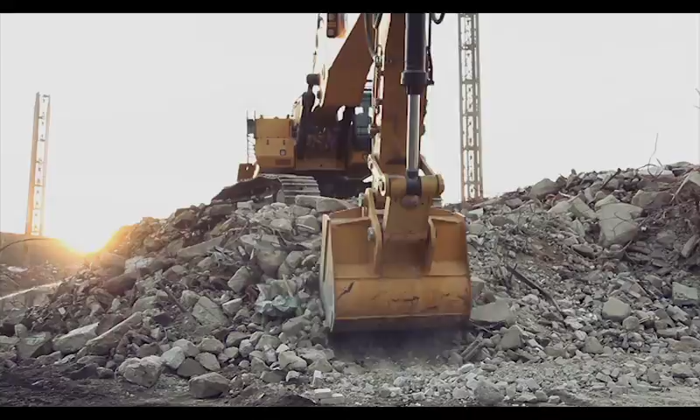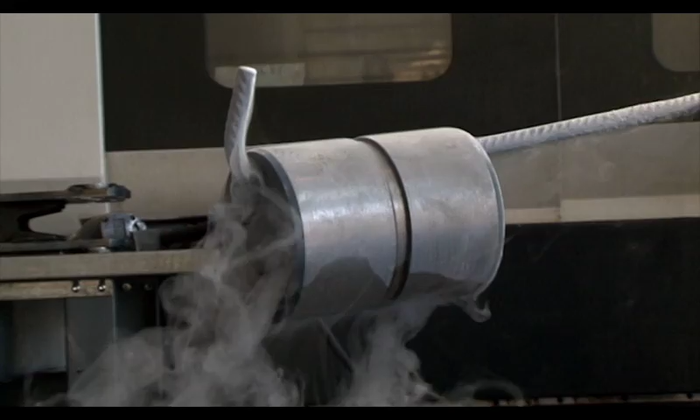The story of Alcar is one which has deep roots ingrained in the best of Italy, that which invents and innovates. Alcar is the result of the fusion between CTM, Costruzioni Termomeccaniche Meridionali, with Alcar S.p.A. of Valle in 2005. Two companies who have always associated their name with mechanics and light, medium and heavy mechanical and metalwork fabrication.

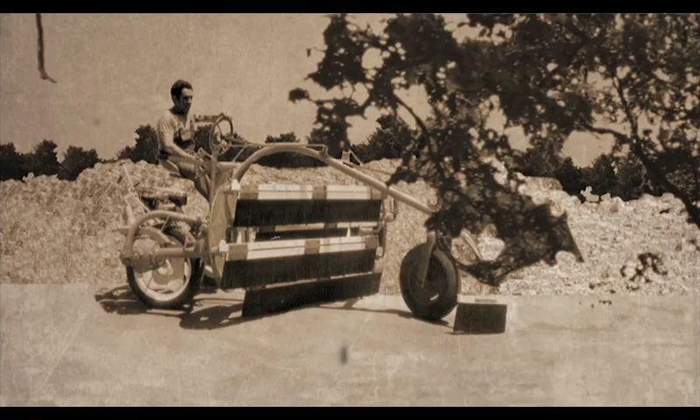CTM has manufactured conveyor belts, cranes and special machines for processing tobacco and the collection of olives in Puglia since 1960, over time becoming one of the main suppliers of Fiat Allis, today's CNH.

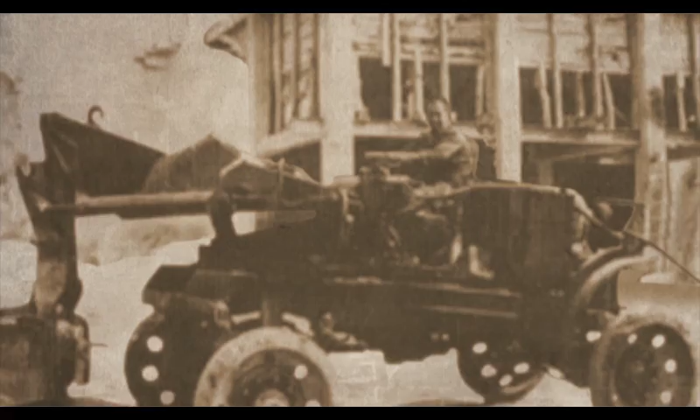Alcar S.p.A. belonged to the Bruneri family, a family which eternally linked its name with the world of earth-moving machinery. It was the Bruneri brothers who invented the first fully hydraulic excavator in the world in 1948.

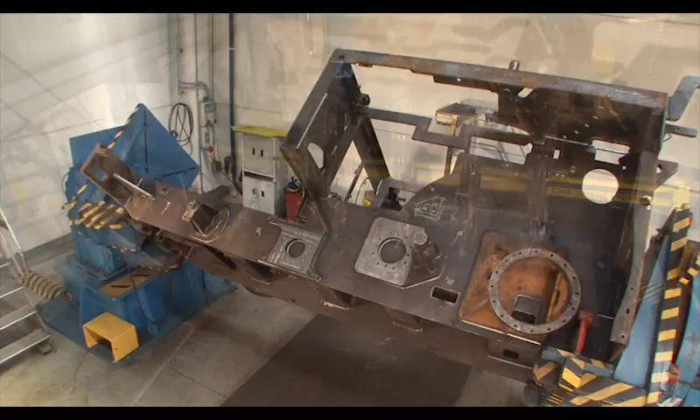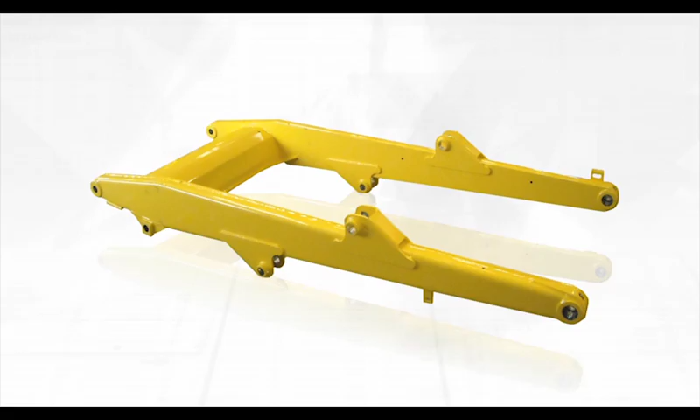Today, Alcar has become one of the European leaders in mechanical and metalwork fabrication for construction site machines. This is the only company in Europe which has a complete internal production cycle. In this manner, any component can be designed and realized independently for our clients.

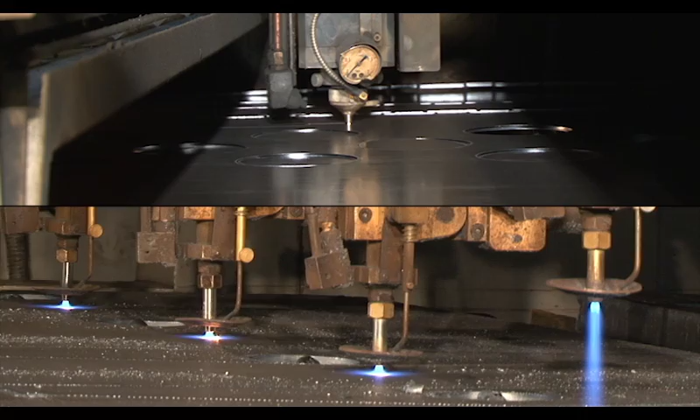But let us proceed in order. Today, Alcar has two plants, one in Valle, in the province of Turin, which manufactures the light mechanical and metalwork fabrication, and one in Lecce, which is for medium to heavy mechanical and metalwork fabrication. The internal management of all of the productive processes, together with the ability to design each component and each processing cycle, has created a virtuous circle.

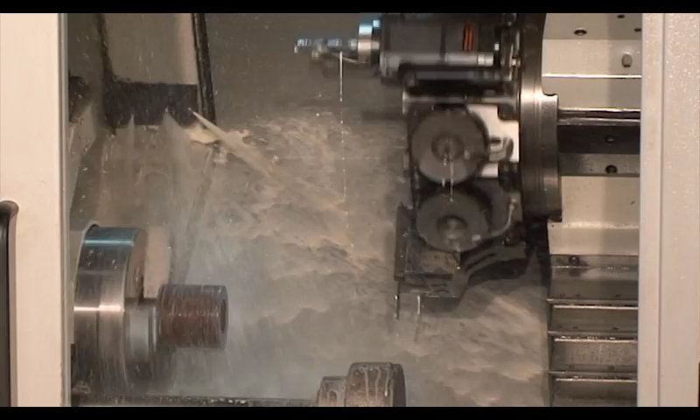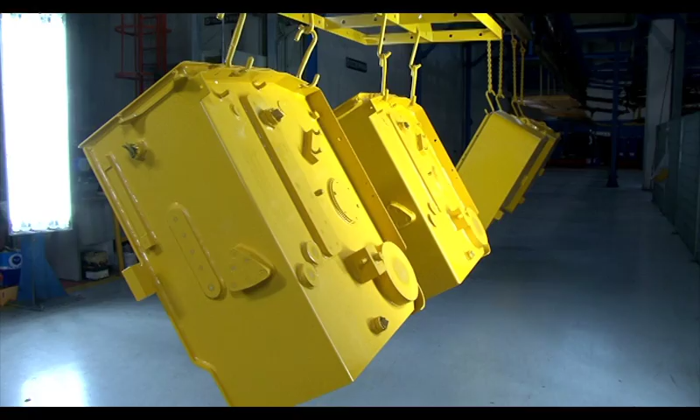On this path of continuous improvement, the increasing expectations of the clients, who are leaders in their own sectors, meet a continued and positive response. Today, Alcar counts CNH, Fiat Group, Caterpillar, Liebherr, Olot, Turk Tractor and Sampierana amongst its clients.

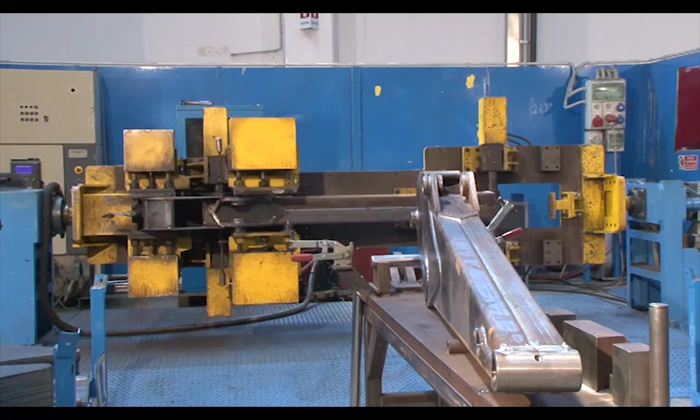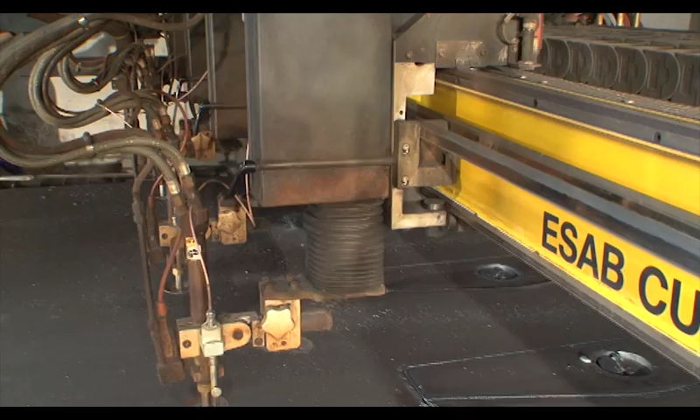In today's markets, which are always challenging and dynamic, Alcar has demonstrated that it knows how to start and above all modulate new productions thanks to a continued interaction between its design department and that of its clients, creating co-design and co-engineering activities. It often occurs during the research and development activity that Alcar not only flanks but substitutes its client, releasing them from burdensome and complex activities.

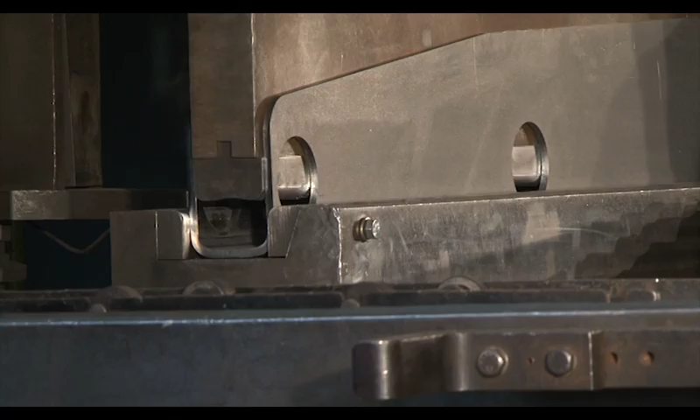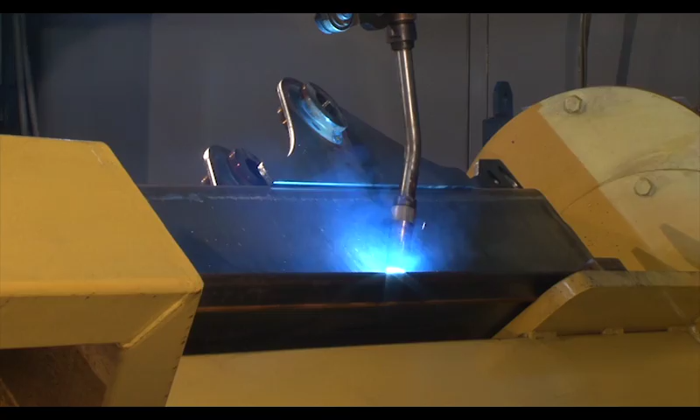The possibility of internally managing each work cycle allows the production times and costs to be positively influenced, simultaneously increasing the level of quality of the finished product.

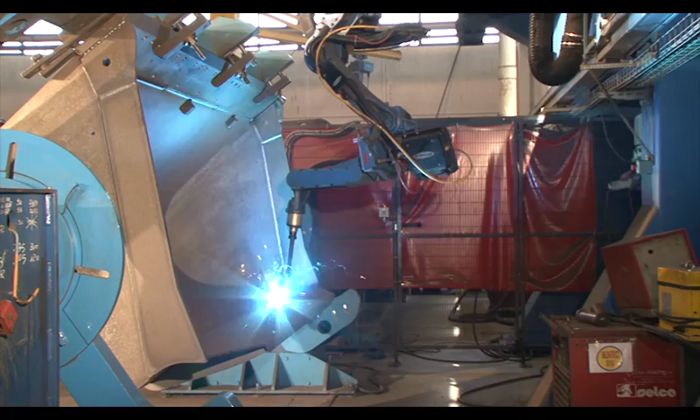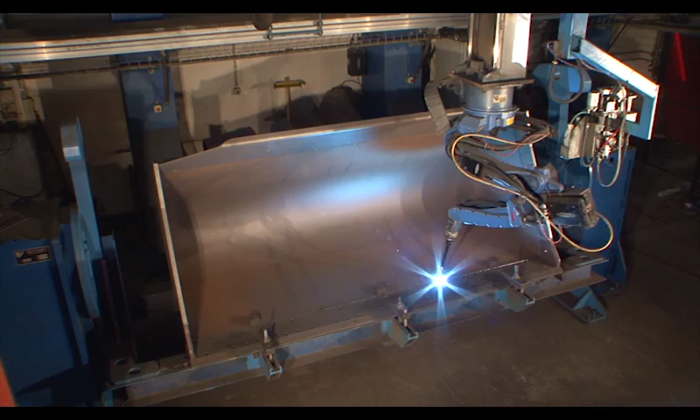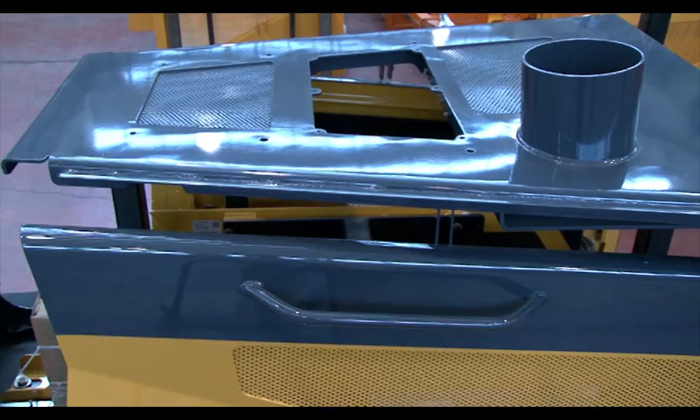The Six Sigma methodology is constantly applied in Alcar and guarantees excellence in service from the point of view of continued optimization. The core business of the company is supplying clients with the finished component, painted, ready for assembly on their lines. The level of enrichment and the component service connected to the products which exit the Alcar plants on a daily basis have reached heights which were at one time unthinkable.

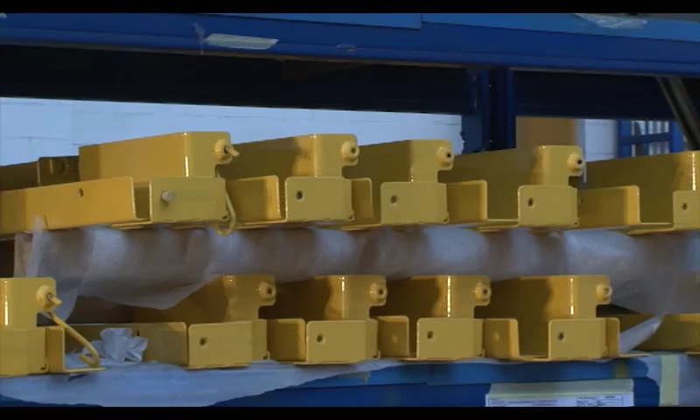The technology present in both plants is mutually integrated. Today, Alcar is the only European company able to supply mechanical and metalwork fabrication components which range from the structural to the mechanical and metalwork fabrication bodywork and tanks.

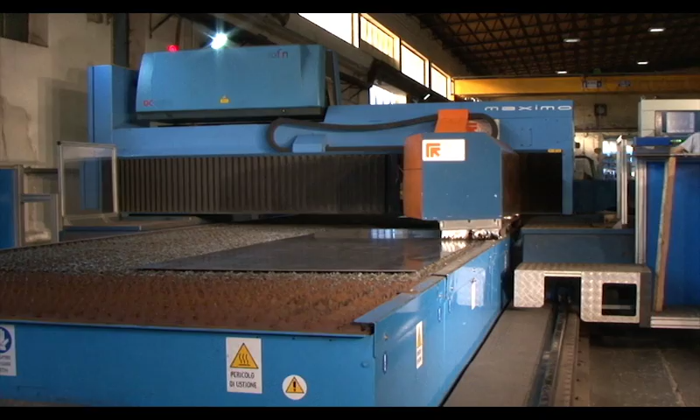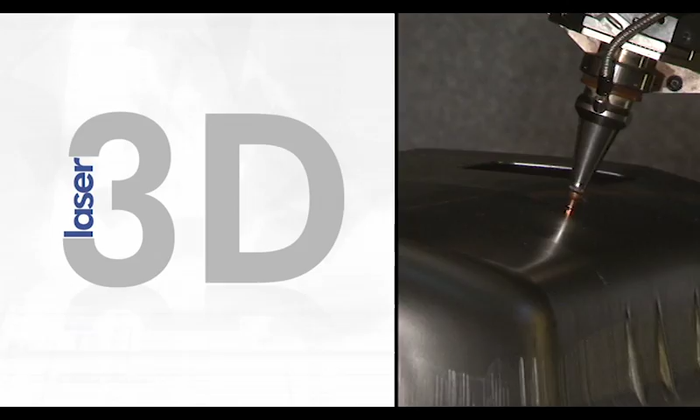Let us look at all of the productive processes in detail. Defined as the production cycle, the process starts with the preparatory phases of the raw material. This is followed by the cutting of the plates, which, depending on the thickness and the characteristics of the product requested, is carried out using different types of technology: 2 and 3D laser, flame cutting, plasma.

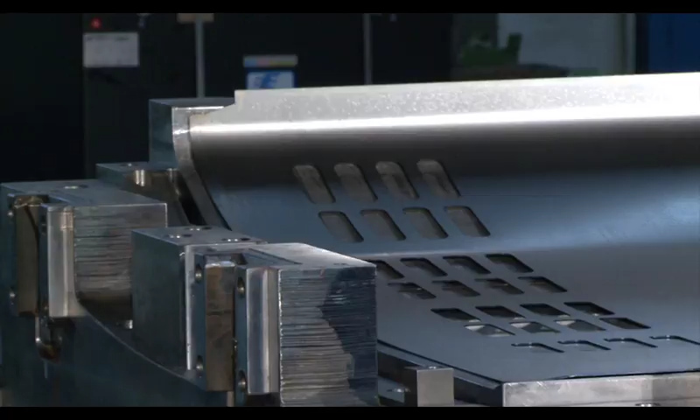This is followed by bending phases, which may be robotized, and the stamping phase carried out with presses which reach 800 tons. The component is welded manually as well as with modern robots.

Once the productive cycle has been completed, a rigid testing and commissioning procedure begins, which guarantees and confirms the made in Alcar quality for the client. Let us look at each phase individually.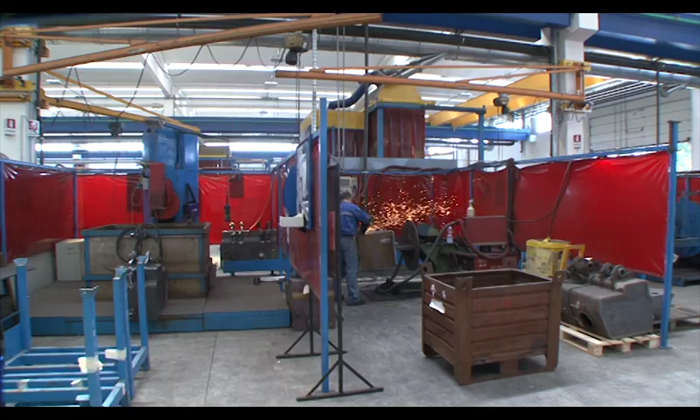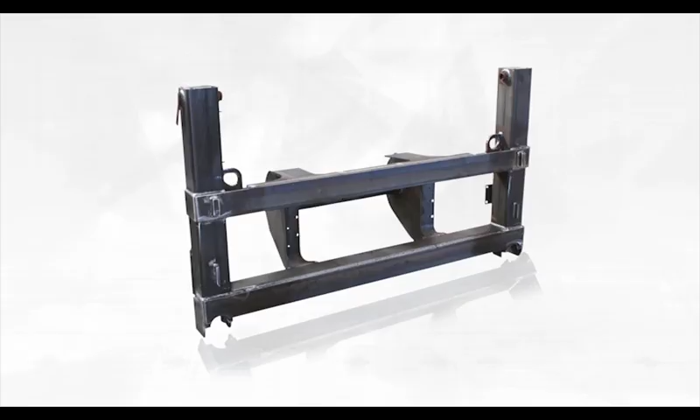The client is supported and assisted during the most delicate part of the design phase, such as the realization and the engineering of new products or the improvement of existing products in order to optimize both the service and aesthetic level of the product as well as its cost.

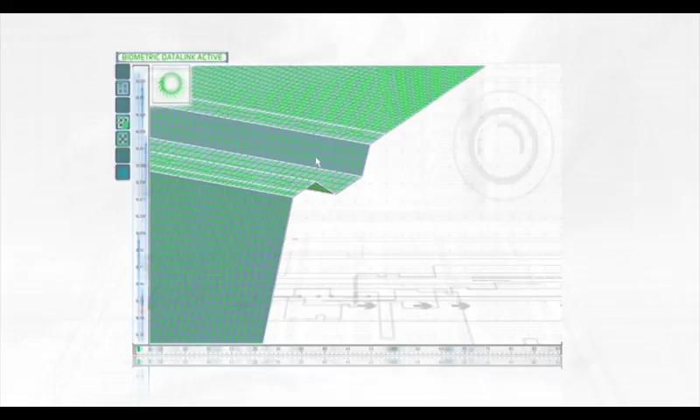The project passes through the FEM structural analysis, the dynamic multi-body or fluid dynamic systems, to arrive at the 3D modeling which are specified in the realization of the executive table.

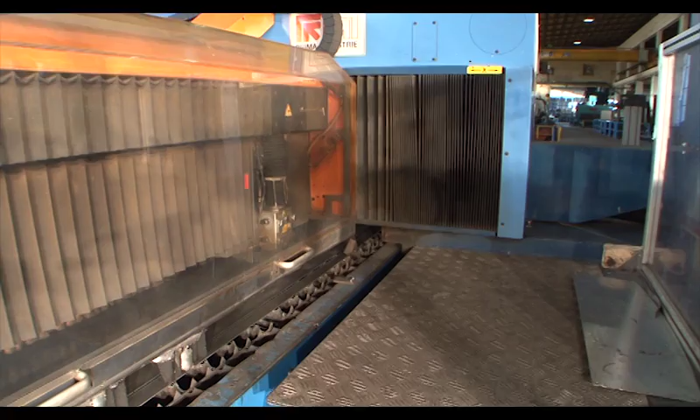The first phase of the productive process is the cutting of the sheet. Alcar has employed the bidimensional and tridimensional laser cutting technology since the beginning of the 1990s.

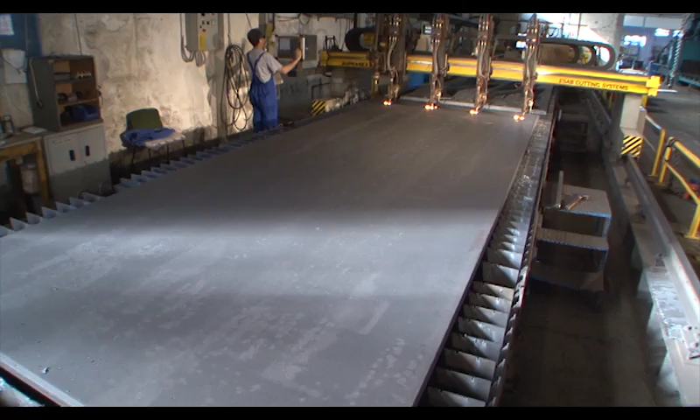Beyond the laser technology, the company also has flame cutting and plasma systems in order to optimize each individual productive request. The laser cutting system is employed for thicknesses up to 25 millimeters, with bench lengths of 3 meters by 1.5 up to 16 meters by 4. The thermal cutting system is employed for thicknesses of 20 to 120 millimeters for a maximum size of 3 meters by 12. The presence of a plasma torch, which works in combination, increases the flexibility of this system.

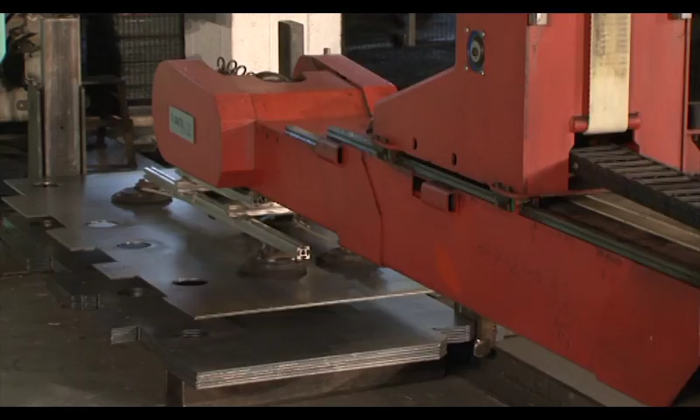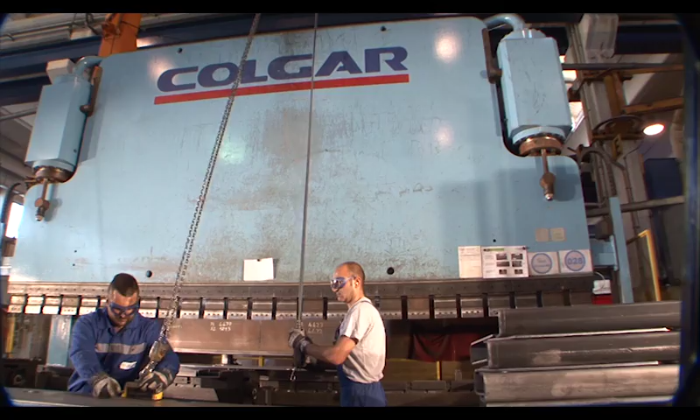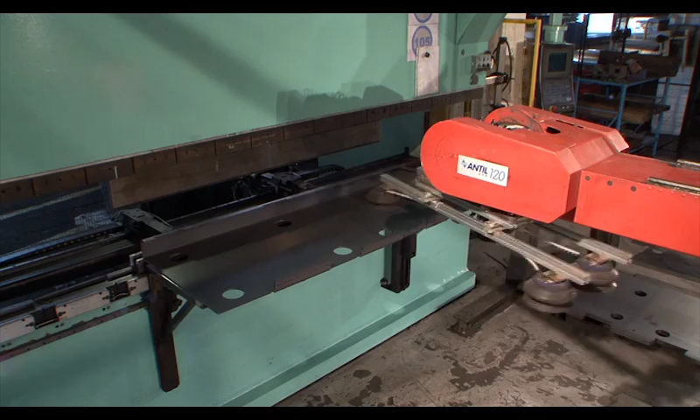Once cut, the plate is bent following a number of preparatory phases, if foreseen, such as burring, beveling and puncturing. Colgar employs presses which reach up to 800 tons with a maximum bending length of up to 6 meters. The use of robotized systems for the automation of the bend, with a capacity of between 120 and 250 kilograms, and the control of the relative angle, significantly increases the efficiency of this process phase.

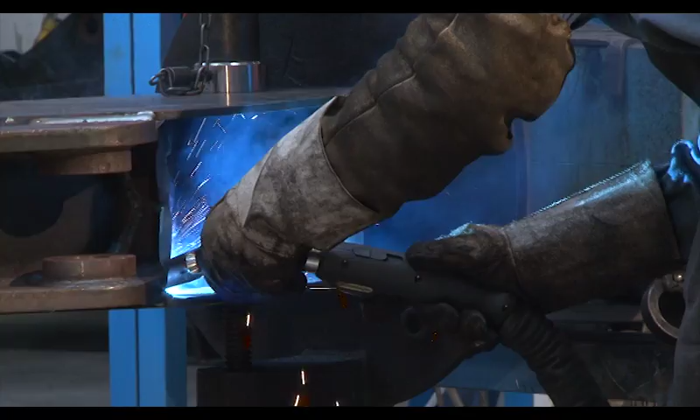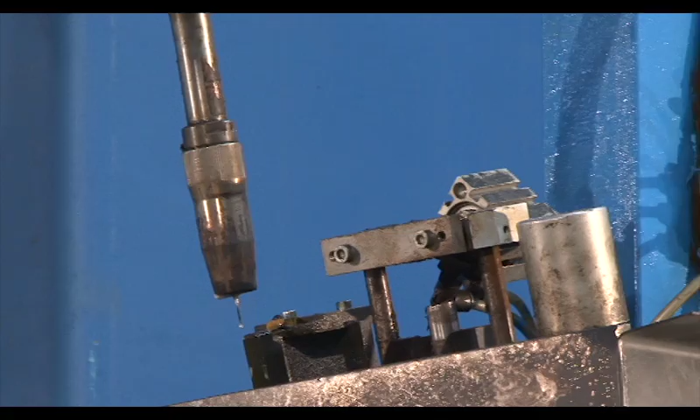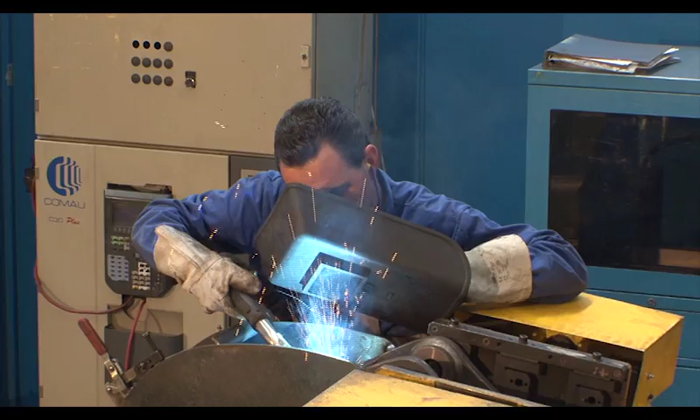The component welding phase starts after the bending. Here, one of the most delicate phases is carried out in the specific departments. The technology used is MIG-MAG arc welding with continuous wire welding. Colgar has approximately 50 robotized systems which allow it to reach elevated levels of productive capacity. Each robotized island has a seam finder and seam tracking system with both a technological laser and electric impulses. The robots are flanked with over 200 manual stations in which specialized welders work, all of whom possess the necessary UNI-EN ISO 287 certification.

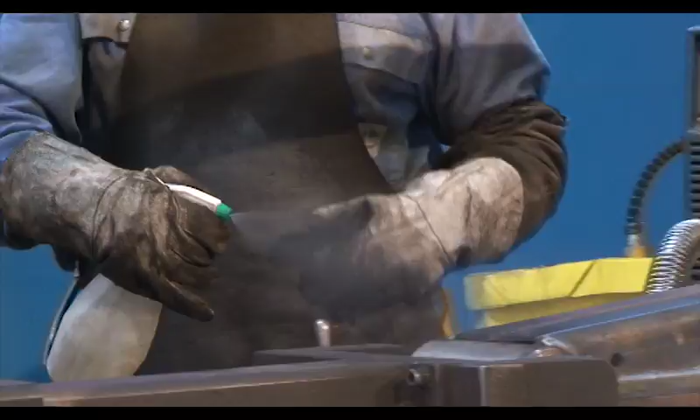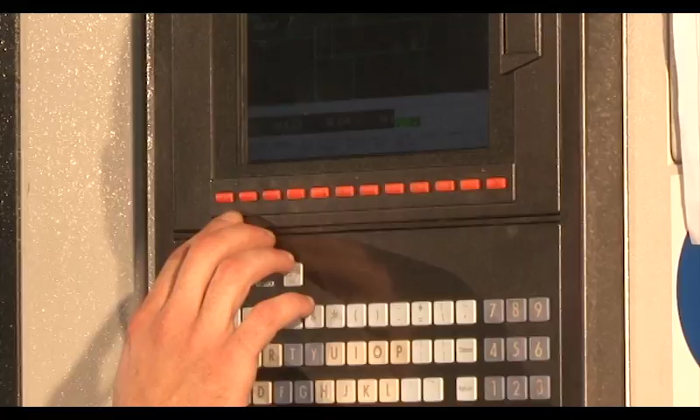The machining process department, concentrated in the plant in Lecce, allows a highly varied range of operations to be carried out. The machine park is composed of CNC turning, boring and milling machine high-speed work centers.

The sealing tests and phosphating tests are carried out after the above-mentioned phases, depending on the production of the tanks. Both are carried out through independent immersion systems that guarantee excellent quality results.

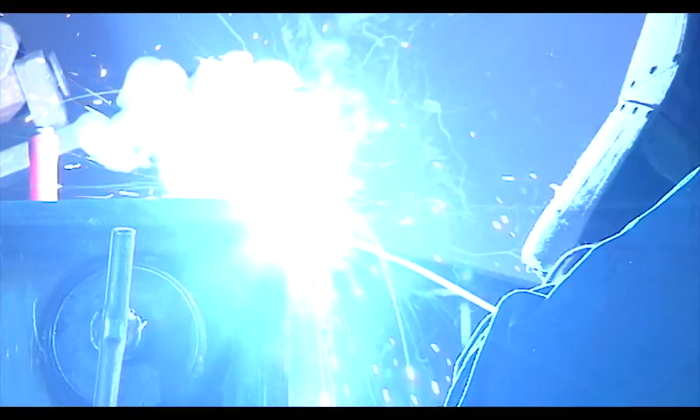Following on from the productive process, the light mechanical and metalwork fabrication components then continue with the cleaning process to guarantee the absence of aesthetic defects on the surface to be painted.

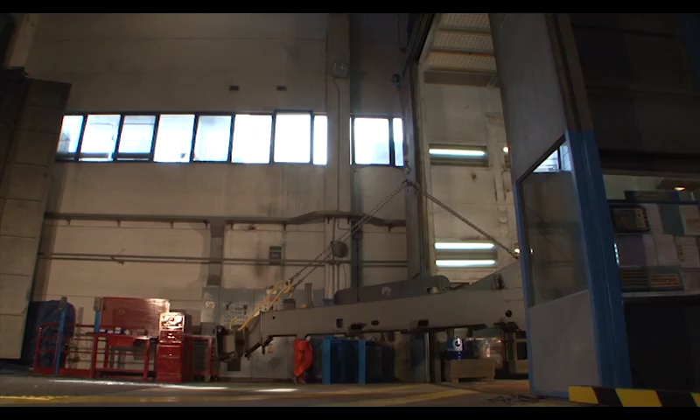When these various processing phases are completed, the light or medium-heavy mechanical and metalwork fabrication is ready to be painted. Alcar has 3 painting plants, of which 2 are in Lecce and 1 in Valle.

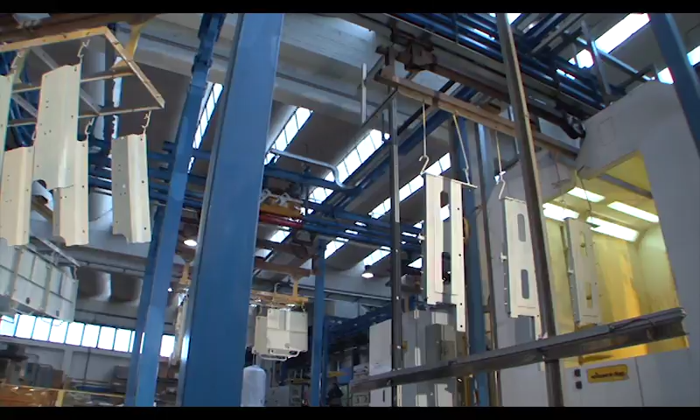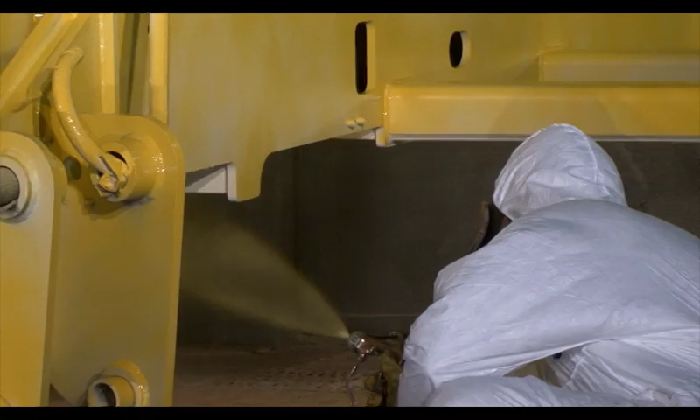In Lecce, the presence of a large liquid painting system, which is able to handle pieces up to 6 tons in weight, allows an elevated standard to be produced in respect to the environment. This objective is reached by employing technology which is able to use water-based paint.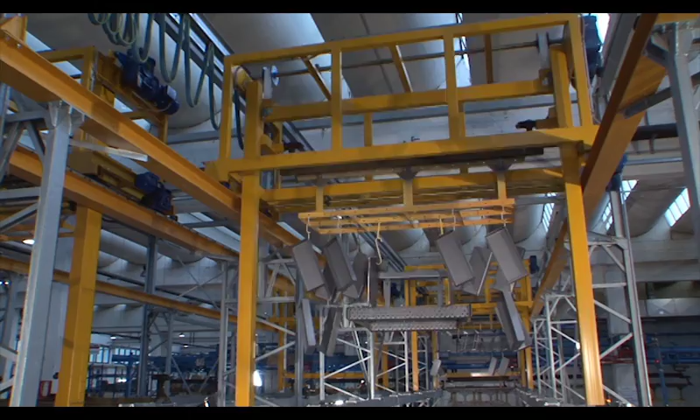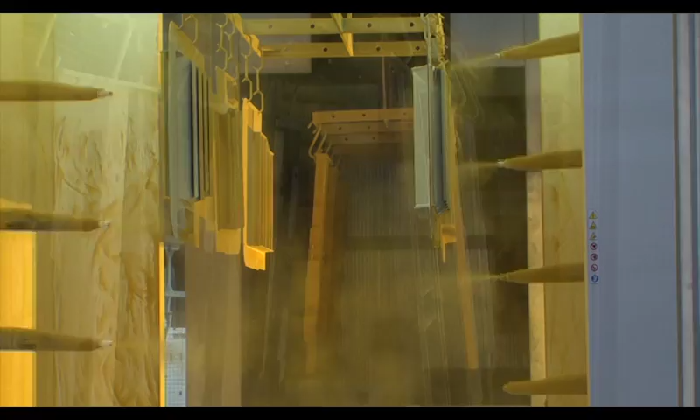In Valle, given the different types of products built, a sophisticated system with an overhead box conveyor, automatic loading and unloading cell, pre-treatment tunnel through phosphodegreasing, primer application cabin, 3 powder cabins, of which 2 are automated, and the relative drying and flash-off ovens has been installed.

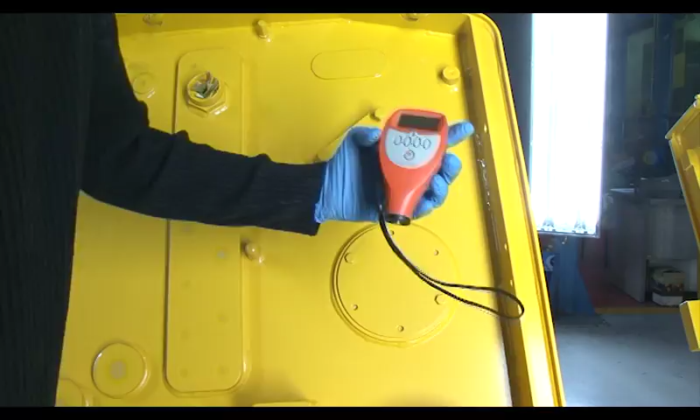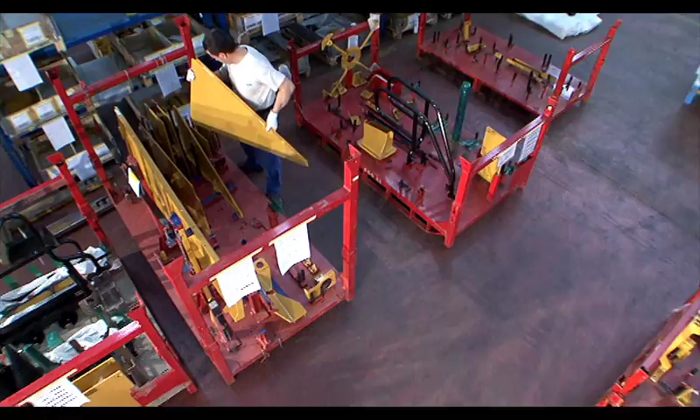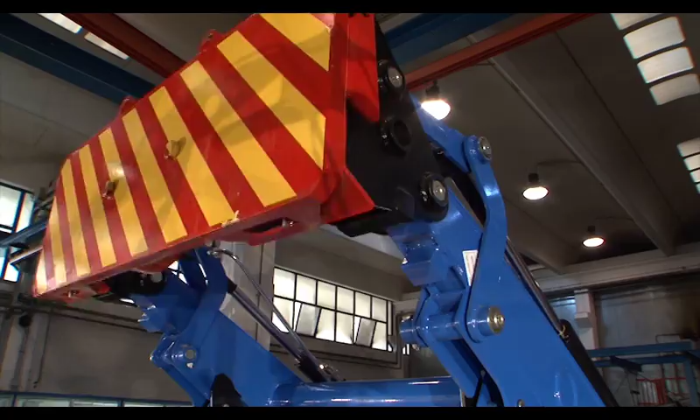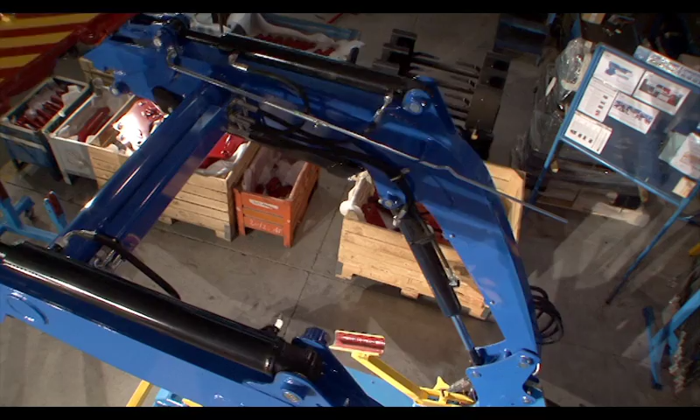Specific tests employing hydraulic components are carried out on products to simulate the same conditions as their final use before shipping, reproducing the strain and the stress to which the component will be subjected during the normal life cycle. This is the manner in which the operating quality of the product is guaranteed.

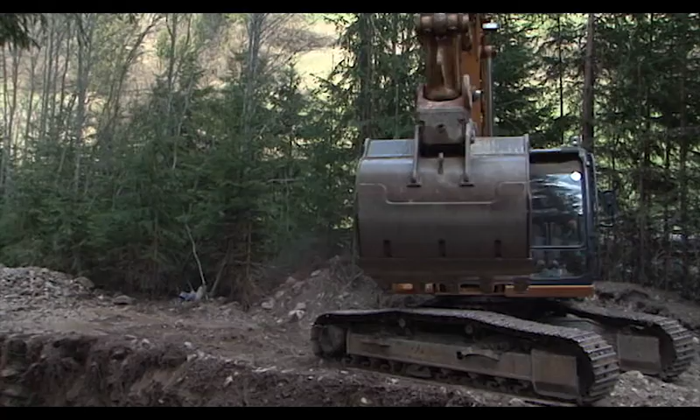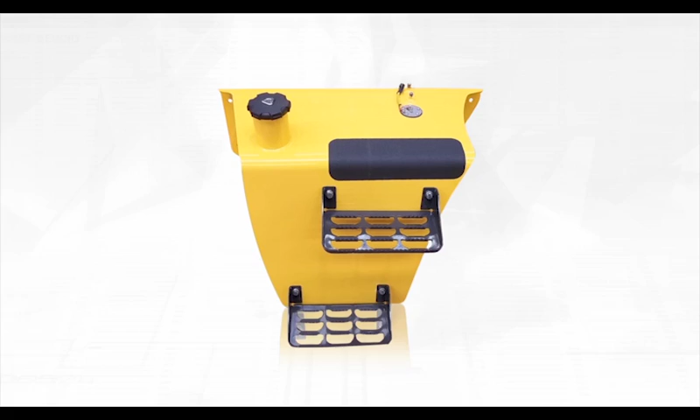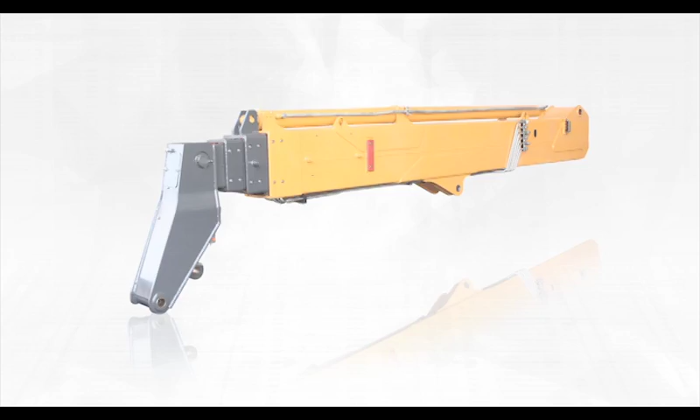Alcar works in a number of different sectors: earth-moving machines, agricultural machines, lifting systems. The range of products is also complete and includes light structural work to medium-heavy structural. In the medium-heavy sector, Alcar currently produces the loading arm, the digging arm, the frame and the bucket of the backhoe loader, the telescopic arm of the telehandler, the pushing arm of the bulldozers, the frame of the paver, the loading arm of the agricultural tractor, the frame of the mini excavators.

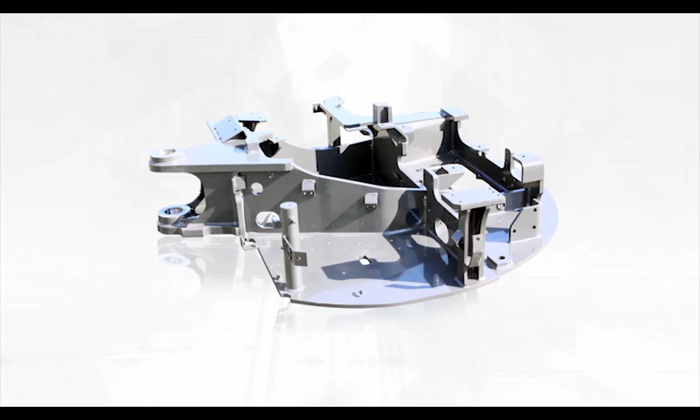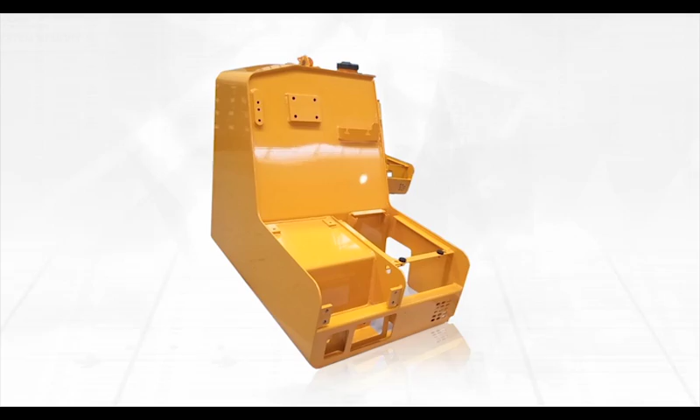The main light mechanical and metalwork fabrication products are represented by bodywork kits and by tank, oil and gas oil kits for machines such as backhoe loaders, large wheeled and crawler excavators, wheel and crawler loaders, and pavers.

Alcar. How to get from a simple idea to a finished component without having to think about it.